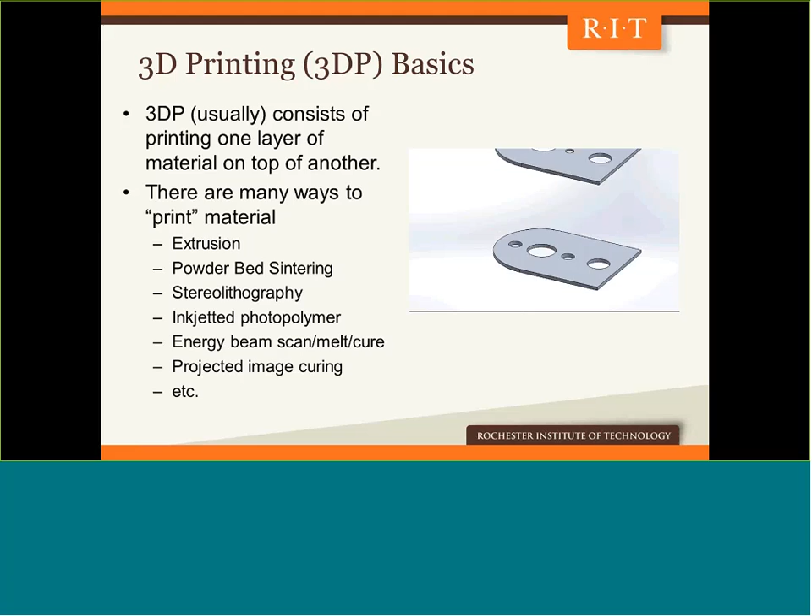So the basics: most 3D printing or additive manufacturing processes involve printing or depositing one layer of material on top of the next. In the same way that there are a lot of ways to print documents or photographs, there are also a lot of ways to 3D print materials. But the primary distinction here is that when you apply one layer on top of the next, you build thickness, and that thickness is the third dimension in 3D printing. So there's a list of different processes there, and I'll talk about some of them in the following slides.

3D printing can't do everything. There are limitations, and it's important to recognize them.

3D printers are very slow compared with conventional manufacturing, molding or casting. What you save is the time it takes to make molds that you would cast plastic or metal into. So you do save time on making molds, but the printing process itself is a little bit like watching grass grow, except that grass grows faster in some cases than some of these 3D printers. Most 3D printers are limited to relatively small, let's say 8 to 10 inch cube part sizes. That's fine for a lot of parts, but if you're in the aerospace or automotive industries, that's quite limiting.

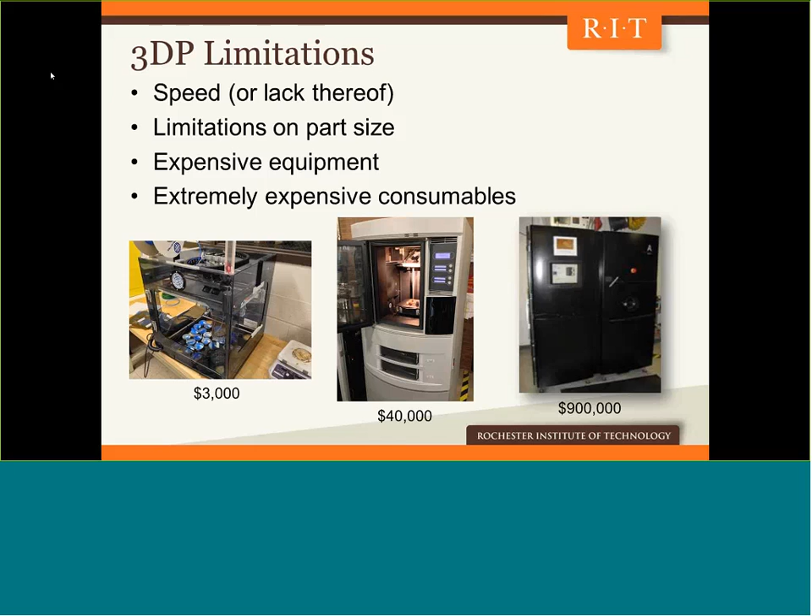The cost of the equipment, MakerBots are on the order of $3,000 now. The machine you see on the right-hand side of that image is almost $1 million, and that's for making metal parts. That was a machine in my old lab before I joined RIT. The consumable materials you print with these machines are also quite expensive. In a lot of cases, they might be 5 to 10 times more expensive than the same material you would mold or cast. That's a challenge the industry has to try to overcome in the coming years before these technologies gain more widespread adoption.

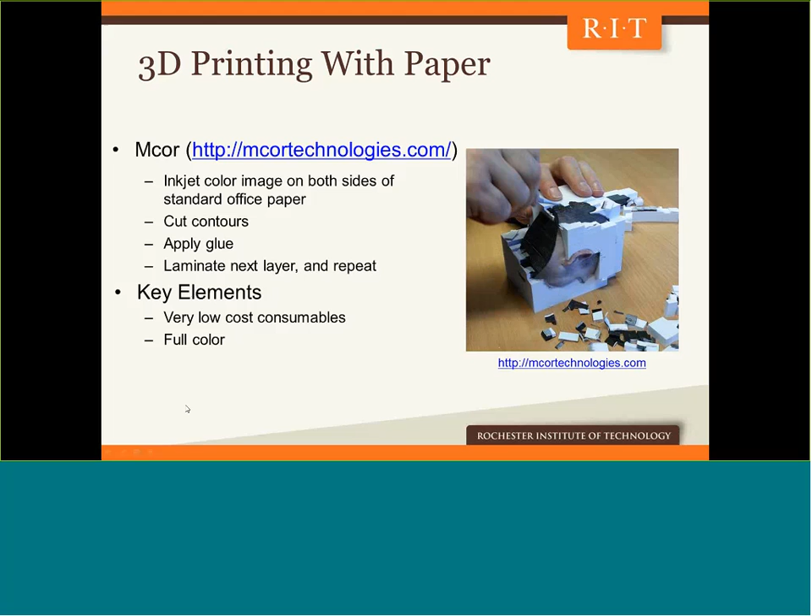The machine applies an adhesive material. You lay down the next layer of paper, repeat the process over and over again, and when you're done, the knife cutter has cut cubes into the scrap material around your part, and you can just pick those cubes off with your hand or a screwdriver, something like that, and you have a color printed part made out of paper at extremely low cost. That's a neat process that has a lot in common with some of the technologies this region is very well known for.

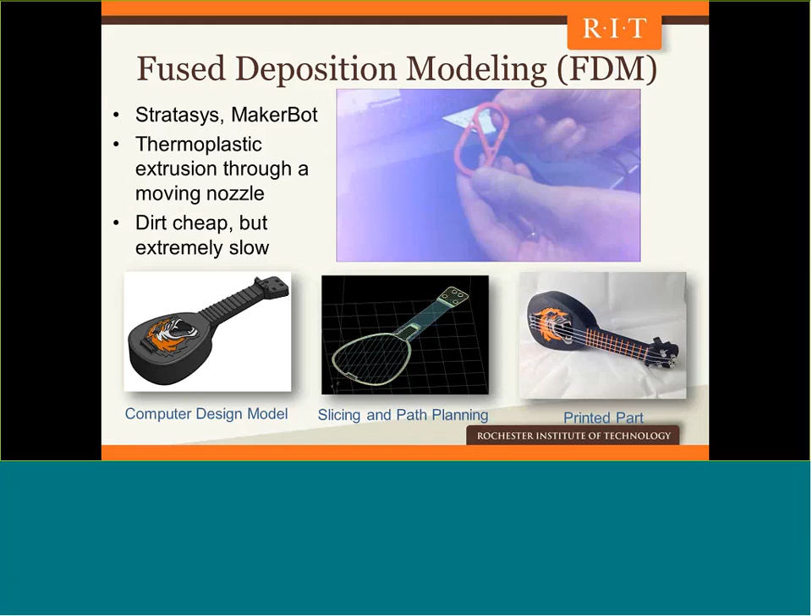Selective laser sintering is a higher-end 3D printing process in which you have a thermoplastic powder, and a doctor blade spreads a thin layer of that plastic powder, and a laser coming from overhead scans or traces the contour and then rasters back and forth and fills in the region that you would like to melt. Anywhere the laser beam scans over the powder bed, it melts the plastic, the same way that if you were drawing an image with a crayon, you trace the contour and then scribble back and forth to color in the area inside.

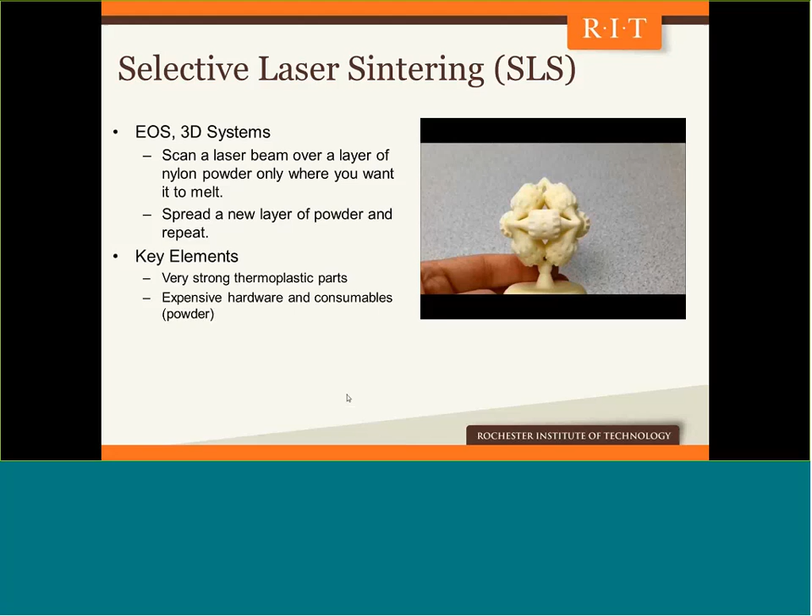If I play that again, one of the interesting things in this video I shot with my cell phone is that comes out of the machine exactly like you see. That's an assembly where the small gap between the moving gears and the pins in the middle of the gear is filled with unmelted particles of plastic powder. When you're done printing, you just wiggle those moving parts back and forth, and the loose powder falls out. That's an interesting aspect of 3D printing, the ability to make moving assemblies of parts without having to do assembly after the fact.

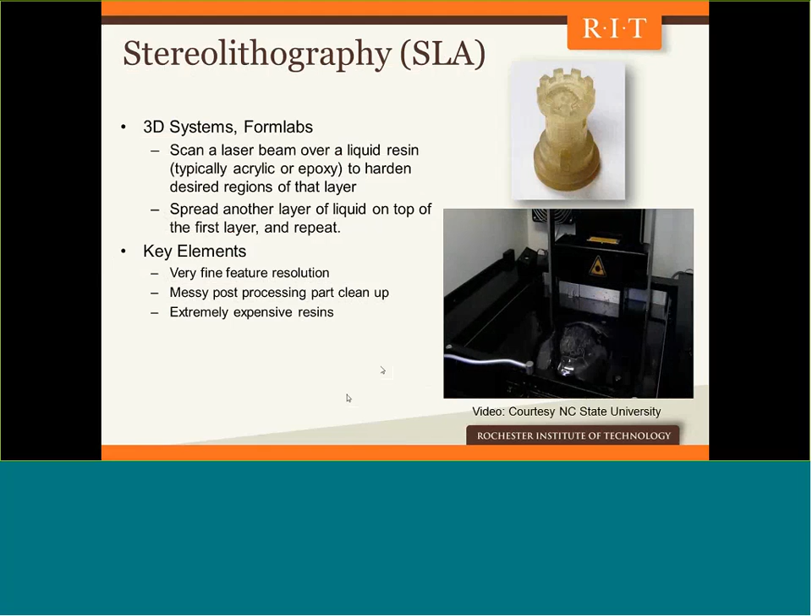Stereolithography, like you see in this video, was actually the very first commercialized 3D printing process. In the vat you see, there's a liquid plastic called a photopolymer. Anywhere that blue laser beam scans over the vat, there's a chemical reaction that causes only that plastic to harden, going from liquid to solid. Then a doctor blade spreads a thin layer of liquid plastic on top of the previous layer, and you repeat the process. Now, through the magic of Adobe Premiere, we fast forward to the end.

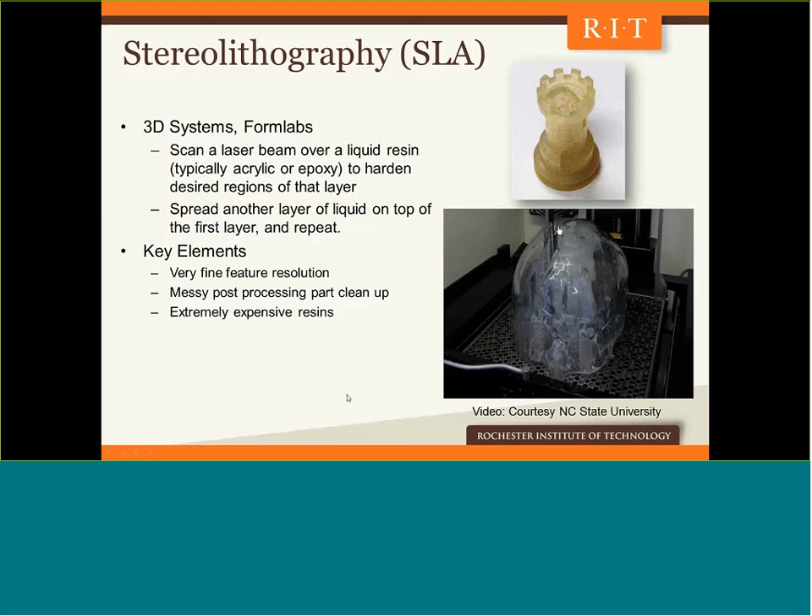This machine was in my old lab at NC State. We have newer versions of this process now, but that's a 3D printed skull model with a really nasty skull fracture. This is what's called stereolithography.

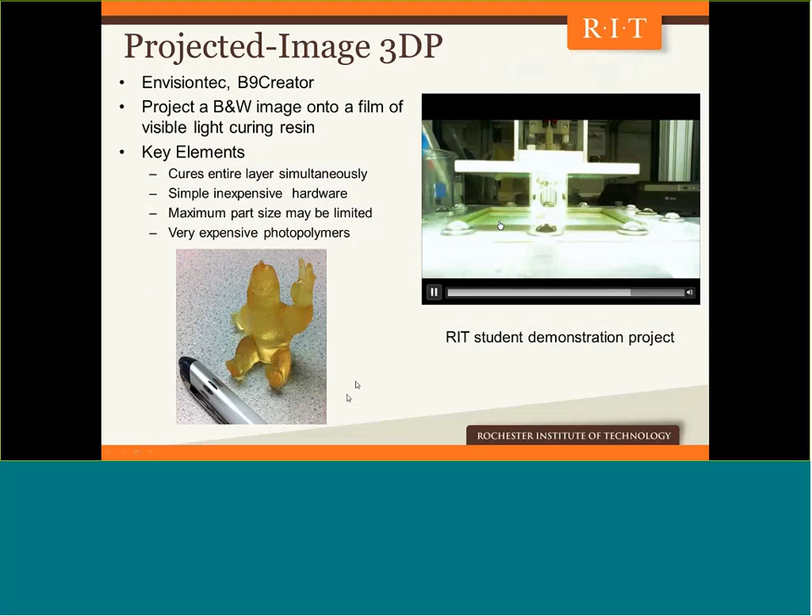One of the newest types of 3D printing is projected image 3D printing. This is fast motion video—students at RIT built this. Now you see it in real time. There's a vat of liquid plastic. That bright light underneath the machine is an ordinary overhead projector like you might have in a classroom, and it projects a black and white image up through the bottom of the clear tank. Anywhere that projected image is white, it causes the plastic to get hard.

Anywhere the image is black, the plastic just remains liquid. In this case, we're actually building the part upside down, so the part sticks to the build platform. The abominable snowman you see here was the very first successful build the students did using this machine they had constructed. It's worth noting they made their own plastic resin used in the machine too—they didn't purchase it, they mixed it up themselves. This was a nice learning exercise for the students. Machines like this are commercially available for on the order of $3,000, give or take, right now.

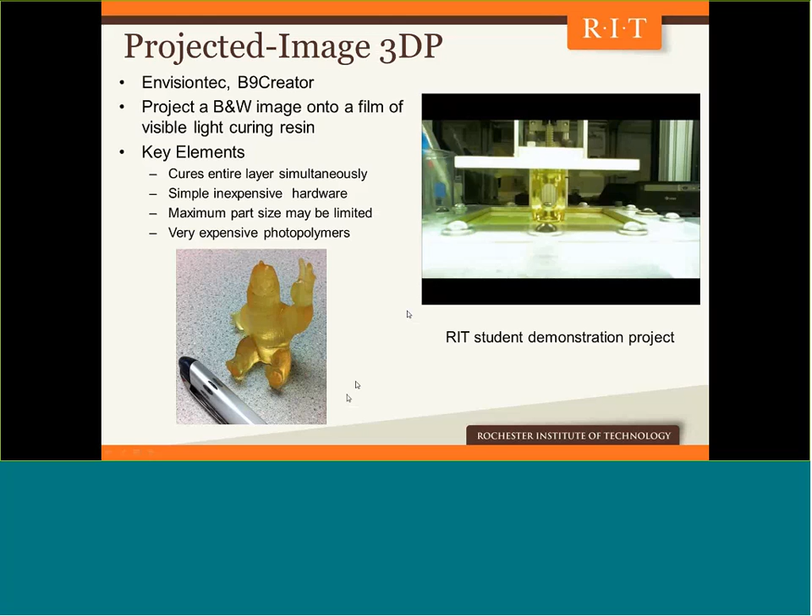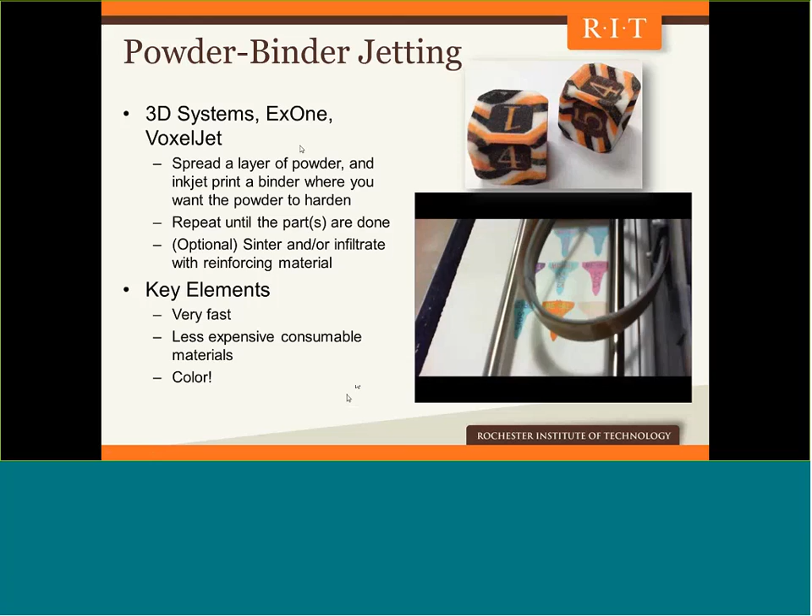We get to inkjet based printing, and this is where a lot of the cutting edge, or next generation, 3D printing developments are taking place. Stratasys and 3D Systems are the two primary companies working with this process. The idea here is that it's a color inkjet print engine like you'd normally use with colored ink, the difference being that the ink being printed is actually a liquid plastic, the same type you saw a couple slides ago with stereolithography and the projection-based machine.

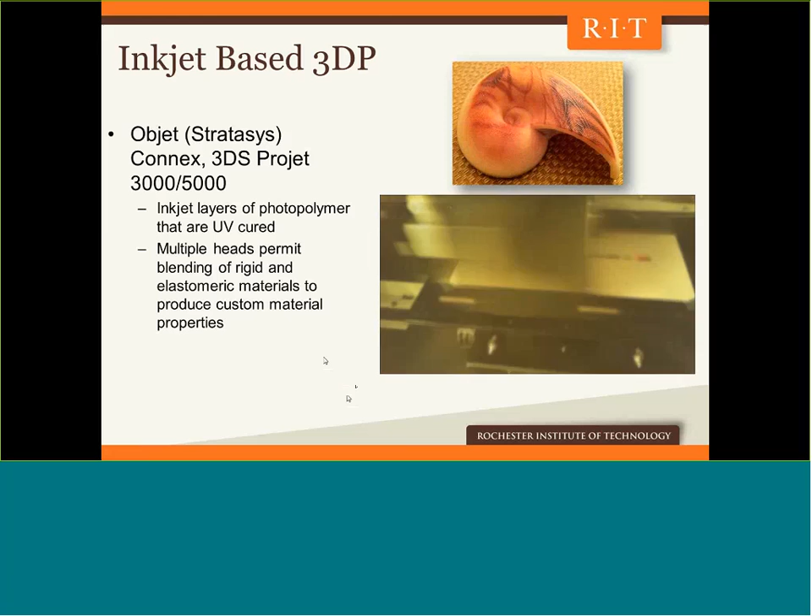So you're able to inkjet print color liquid plastic—I'll run this one more time. You'll notice when the video is running there's a bright blue flash—that's an ultraviolet light, and anytime you shine that light on the plastic, it gets hard, turning from a liquid to a solid. That's how you can print color, functioning plastic parts in three dimensions, printing one layer on top of the next.

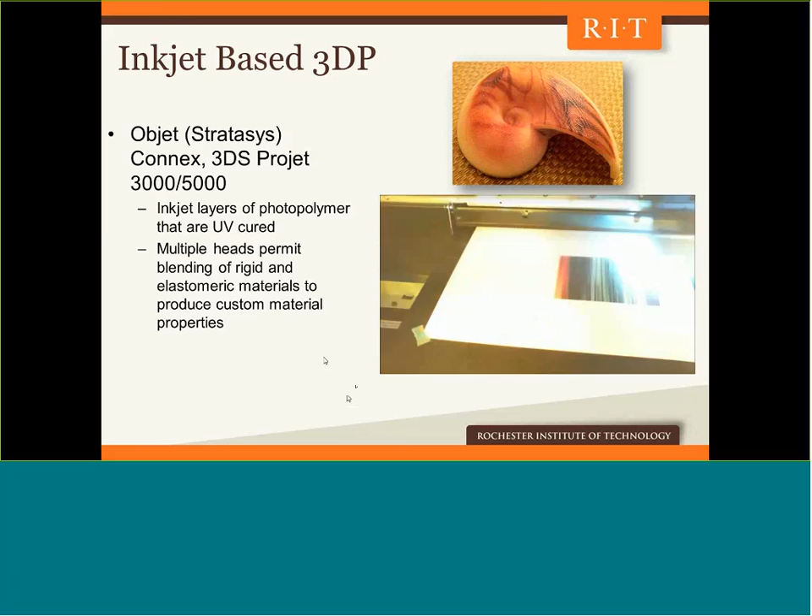This right here is a machine we just got delivered to the lab a couple weeks ago. The installation and training for this is going to take place next week, but we have one of these 3D printers in the lab now.

So can metal parts be 3D printed? And the answer is absolutely. Here's an example of an electron beam melting process. The same thing can be done with laser beams.

The reason it's a little bit tough to see what's going on here, the titanium melts at well over 3,000 degrees Fahrenheit, or over 1,500 degrees C, so you have to have a pretty bulky machine to protect the environment from those high temperatures. In this particular video, it's shot through a leaded glass window, so it's a little tough to see, but you get the idea.

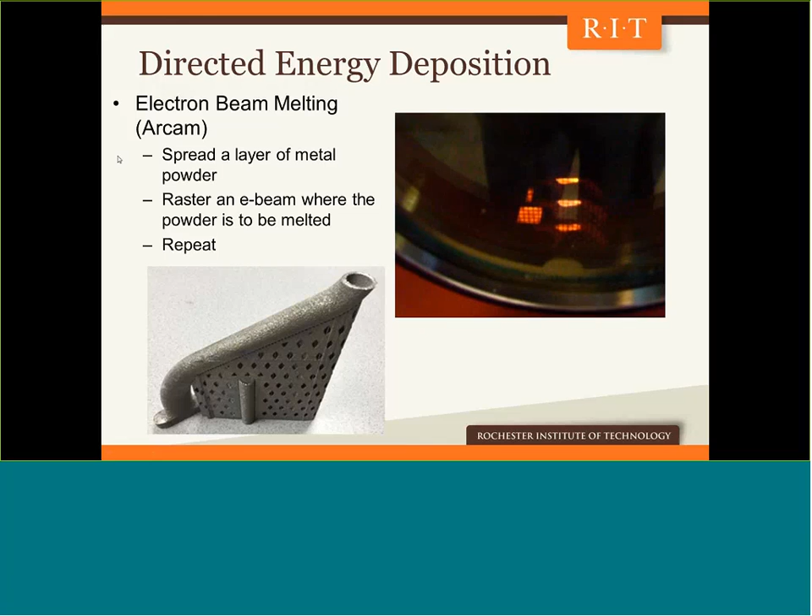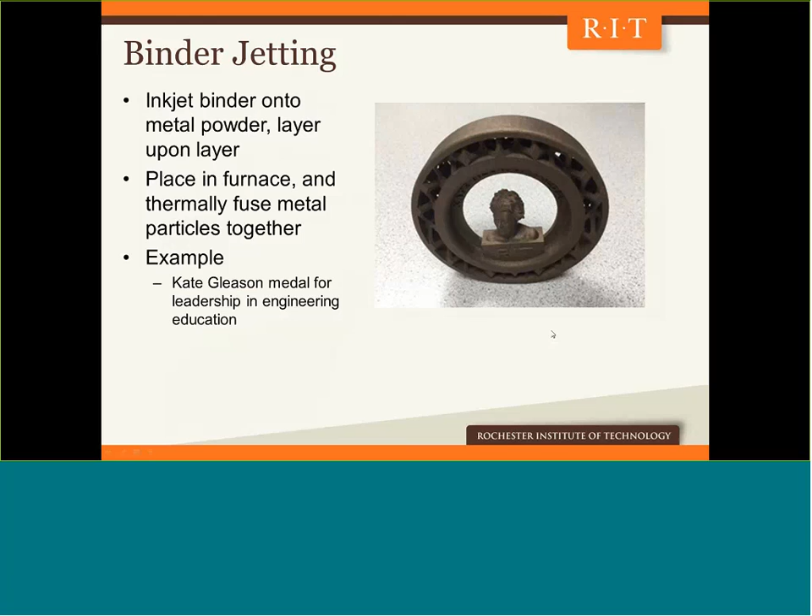The College of Engineering had a leadership medal that was awarded last year, and they asked me to design something that could only be done with 3D printing. It's named after Kate Gleason. I laser scanned the bronze bust of Kate Gleason in the hallway upstairs, and that's the scan, a miniature scan that you see. Then I designed the lattice structure and everything else around that, and this was printed in a bronze steel material that you see right here. A nice example of how that works.

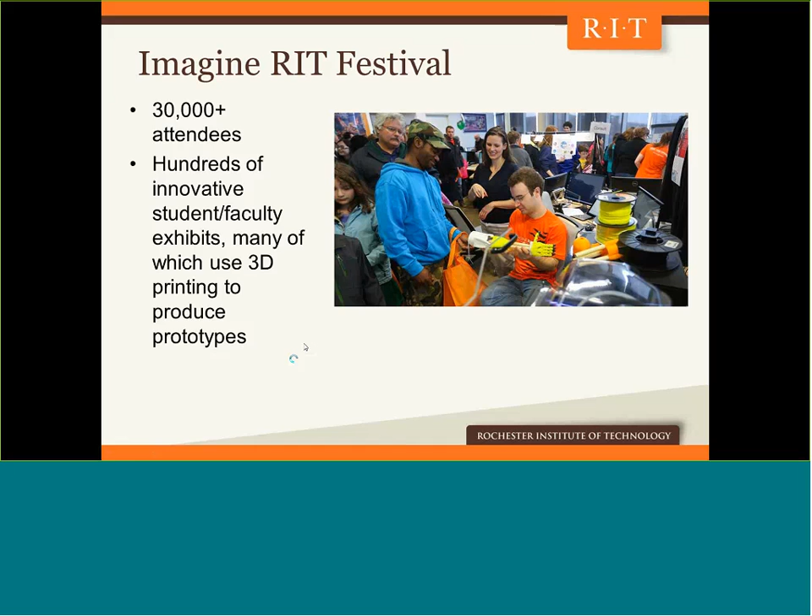It's an event where students, it's primarily student-driven. Students from all over campus spend a lot of time during the academic year leading up to May coming up with cool and fun ideas of things they would like to display or exhibit at the Imagine RIT Festival. A whole bunch of those ideas get 3D printed. What you see in this image is a chemical engineering student named Yasha, who is working on the Enable project, which I'll mention in a few slides, for 3D printing of prosthetic hands. But lots of other Imagine RIT exhibits are made possible because of 3D printing capabilities on campus. This was an interesting one.

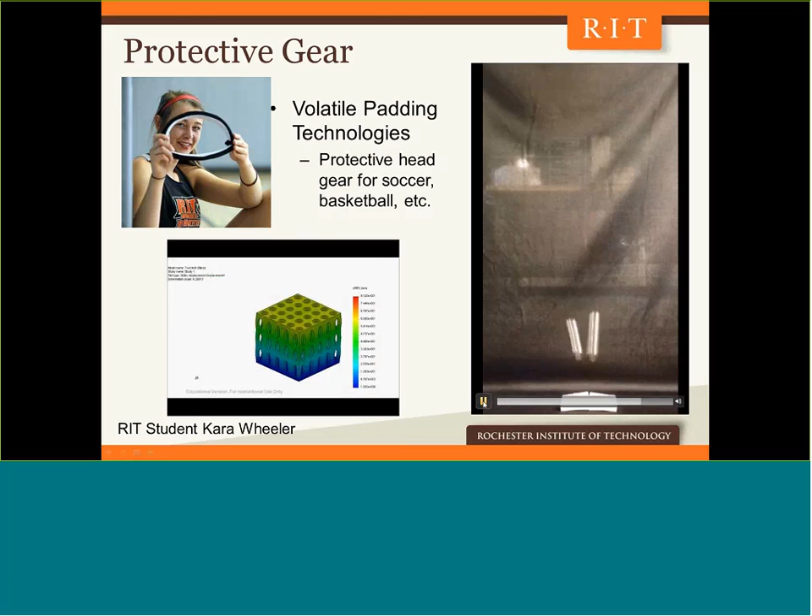In this little video, there are examples of 3D printed rubber material where I put a special type of fluid in one side and not in the other. When the steel balls bounce, you can see the one on the left does a much better job of absorbing the energy than the one on the right. So this is an interesting use of 3D printing that was student-driven, again, with a very specific need.

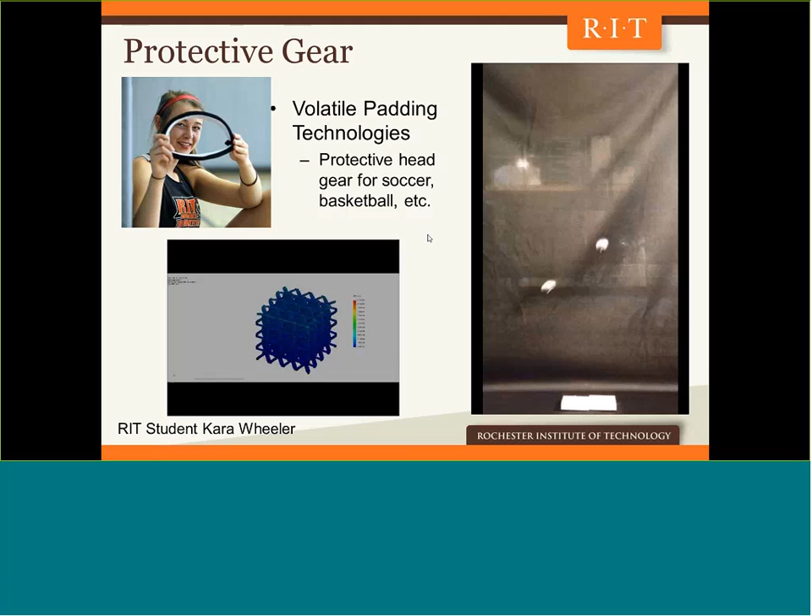There obviously are professionally made prosthetics suitable for adults. But when a prosthetic is $50,000 or more and a child is growing every year - anybody who's a parent on the call knows how often you're buying new shoes and clothes - it's a difficult proposition to keep making new prosthetics every year or so while the child is growing. So that's one motivation here, but also in developing nations, even for adults, it's not cost effective or feasible to have these very expensive prosthetics. So this is a great effort.

The designs for different prosthetic hands and arms are open source and available. You can download them from that website, and anybody on the planet who has a 3D printer can download the plans, customize them, and 3D print them for somebody who lives nearby. So that's another nice campus initiative.

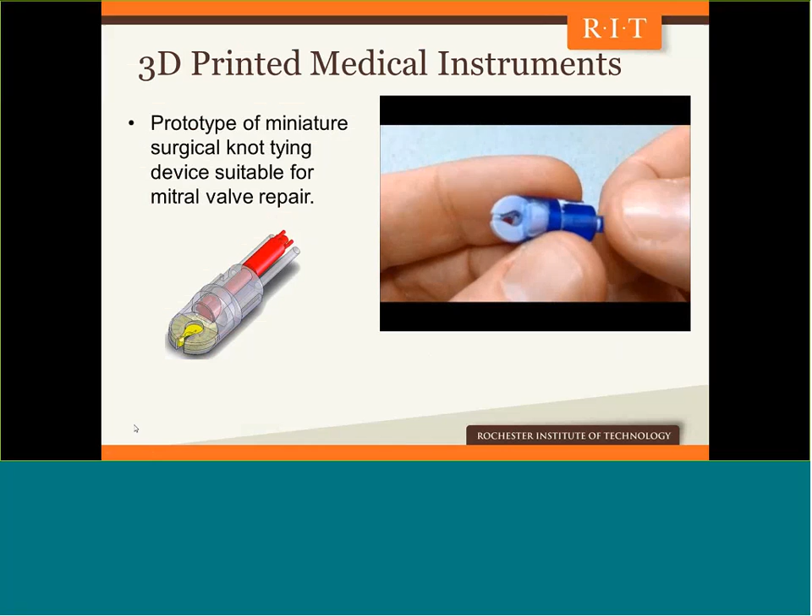Here are a couple examples of 3D printing with medical instruments. This was a project I was involved with involving minimally invasive surgery for mitral valve repair in the heart. If you have a leaking mitral valve, they ordinarily would do open heart surgery where they have to cut your chest open - that's not minimally invasive, that's maximally invasive surgery. With minimally invasive surgery, they just make tiny incisions between the ribs, between the cartilage, and insert tubes that the medical instruments go through.

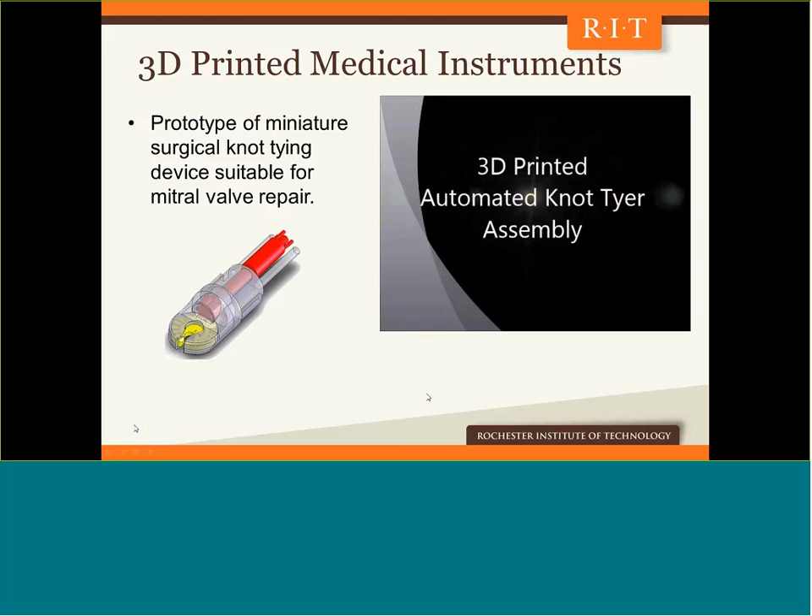This specific project, funded by the National Institutes of Health, had us designing an automated knot tying mechanism, which you see prototyped right here. This is another example of a prototyped assembly where it was printed exactly like you see it - it comes out of the machine as a moving assembly, no assembly required afterwards. So this was a nice use of 3D printing.

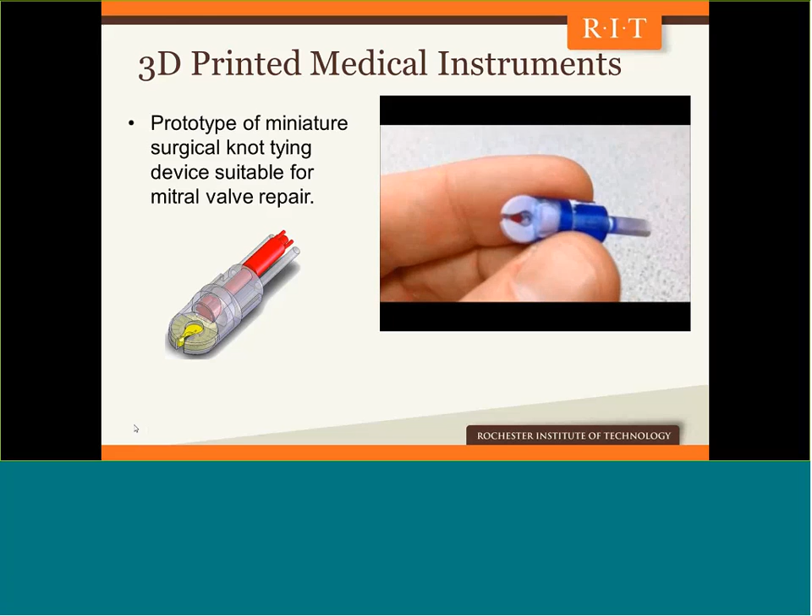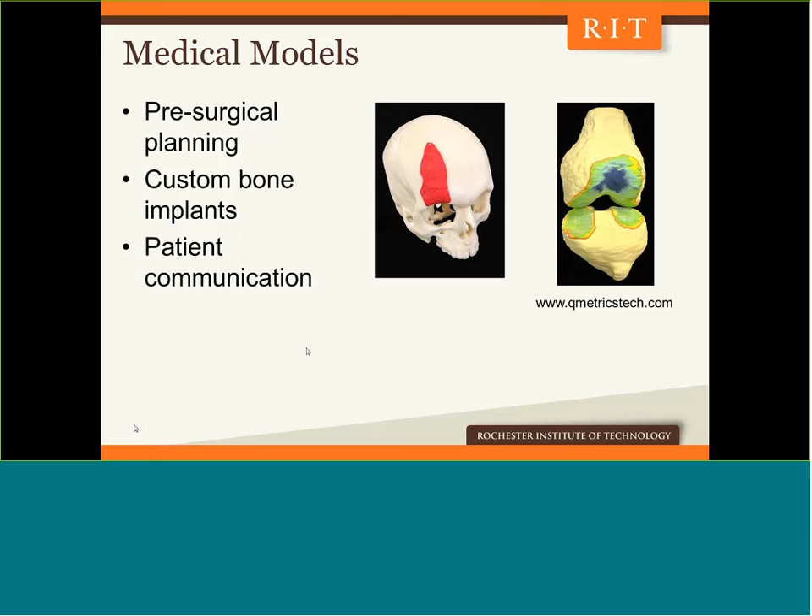This is an example of a medical model. In the 3D printing class I teach, there were students interested in biomedical applications of 3D printing, so I gave them a model of a skull with a nasty skull fracture, and they had to design a custom bone plate that would be 3D printed in titanium for the surgeon to put in place. Those are some examples of how here at RIT we're using these for medical models.

This was an older case, but a nice one I did back around 2003 or so. A German Shepherd with severely deformed hindquarters. There's a special surgery - it sounds gruesome, but they do this with people too. If the bone is curved, you make a cut in the bone, straighten it out, allow it to heal, and everything's fine. This one was much more complicated because the bone was curved and twisted in multiple directions, so it was a really complicated surgery.

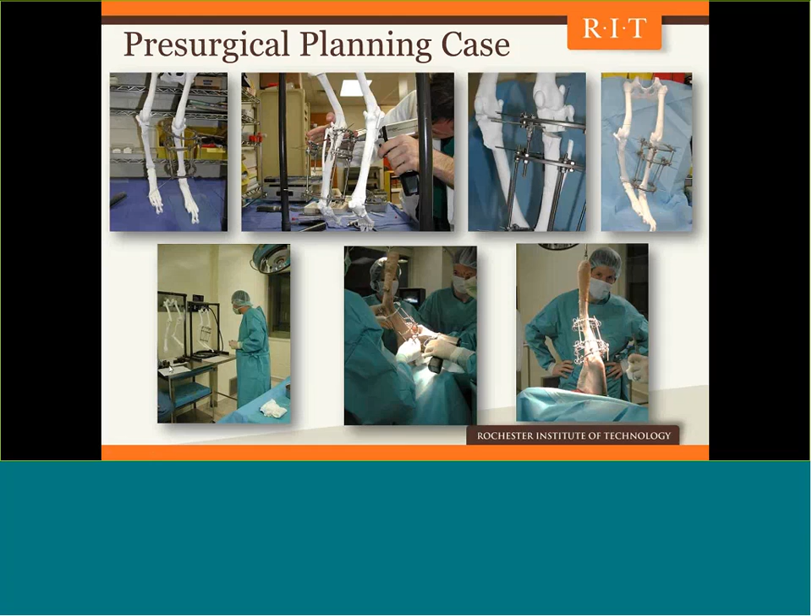The lower left image shows 3D printed plastic models in the operating room, where Dr. Marcellin would go over during the surgery and take measurements of where he had made cuts to the bone, and what angles and things like that, and then he would go back to Bailey, the dog, and replicate that. In the end, there's a very, very happy ending - Bailey went from not being able to walk to chasing the cat around the backyard. We did a whole bunch of these types of pre-surgical planning for difficult procedures over the years.

This is a current ongoing project, multidisciplinary between David Borkholder, a professor of microsystems engineering here, who's the lead on this project. We have several students from at least 3 different departments, 3 different disciplines working on it. This is a project to design, prototype, and test an implantable micropump for delivering drugs to the inner ear to treat hearing loss.

This is an example of next generation 3D printing where we are printing electronic materials, so we can print conductive silver or copper electronic traces, circuit board materials. We can print wax material that when it melts, expands. So we have this wax material that will expand, and when it expands, it squeezes the rubber tubing that has the drug in it, and when it squeezes the tubing, it pushes the drug forward. That's how it's actually pumping, by melting or solidifying wax.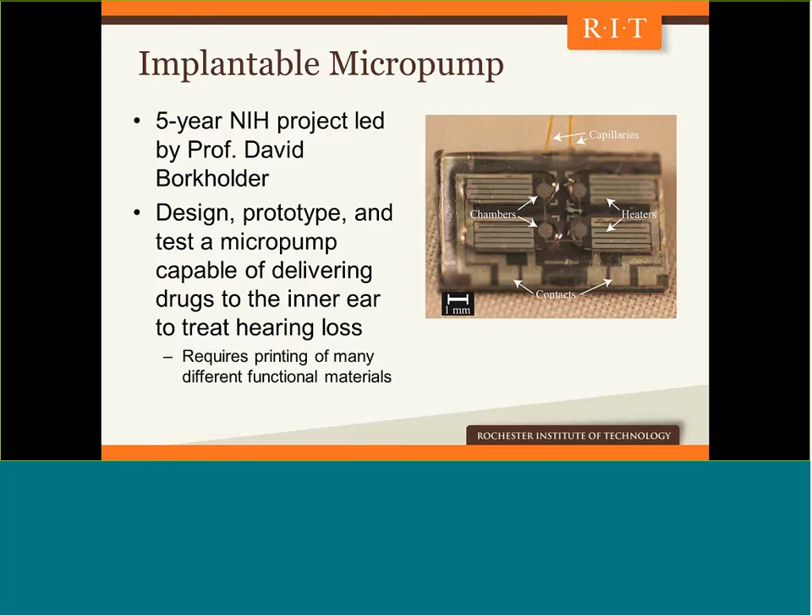So big picture, I think there was a question early on about the significance of 3D printing, and I did talk about impossible geometries and not having to make molds and things like that. But I'll also highlight this: prior to the advent of 3D printing, if you were a company with very deep pockets and had an idea for a new product, that's fine - you've got the budget, there was a model shop, you could make prototypes and evaluate them, and that was fine.

If you were an ordinary person with a really good idea, it was often not practical for you to have prototypes made. With 3D printing now, there are maker spaces in just about every community, Rochester included, where anybody with an idea can go to a community maker space and have a functioning model of their part 3D printed. There are lots of local service bureaus who 3D print professionally and do a fantastic job. Even kids in elementary, middle, and high schools have 3D printers in their libraries or robotics teams. I think this is one of the biggest impacts of 3D printing—it's really accelerated the rate of innovation and who has access to turn their ideas into models and hopefully into startup companies or licensed technologies.

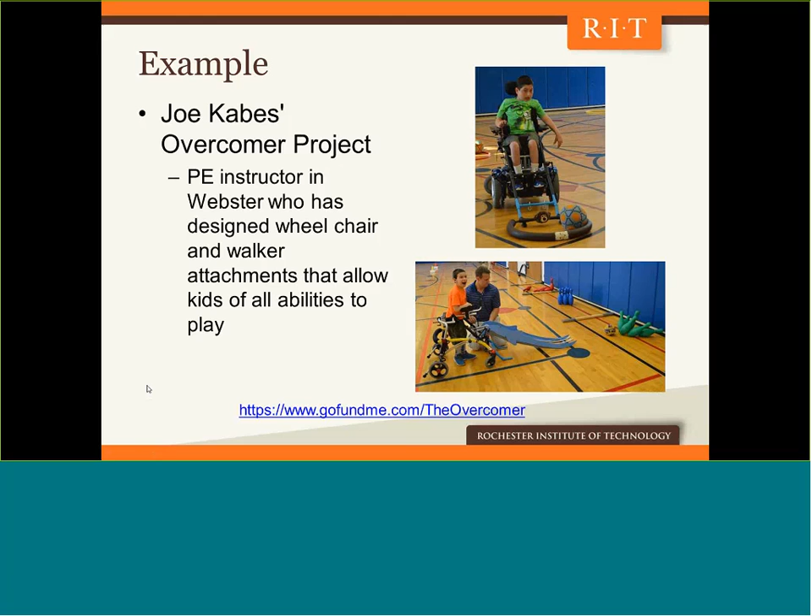But we're putting a project together this summer, and this will be a senior design project next year in engineering, where students will design more production-ready hardware for Joe. Then we'll use 3D printing to print prototypes of that hardware to make examples he can take to a production company to try to get these things made. The web link on the bottom right has details and other examples of prototypes Joe has made. I love that example too, of a person who's been able to turn his ideas into reality.

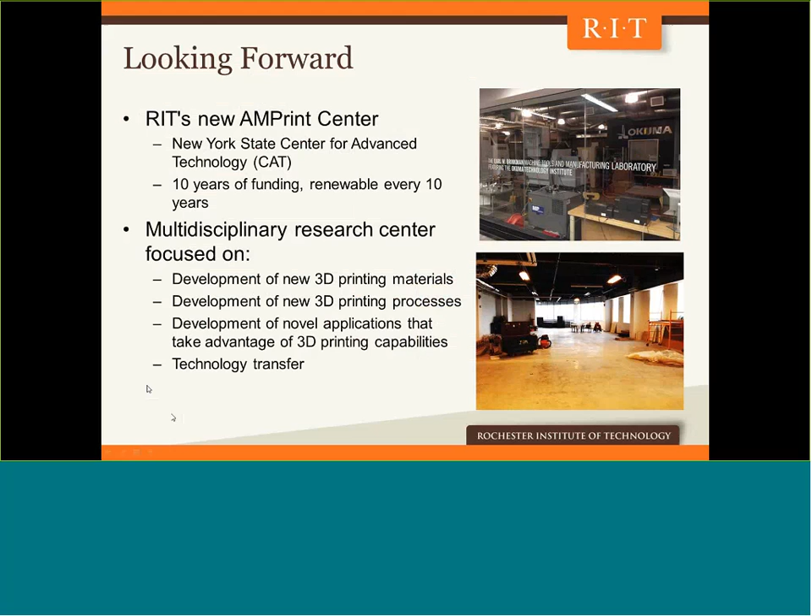To close things up, looking forward, RIT just a few months ago got funding from New York State for a new Center for Advanced Technology, or CAT, focused on additive manufacturing and 3D printing. The lower image shows what the space looks like today. In October, we'll have our grand opening with all the new equipment going in there. Right now we're cramming all the equipment into the lab you see on top, but this will be a beautiful facility when it's ready in October.

With that, I have maybe 5-6 minutes for questions. Yep, I'll try to talk fast. Yep, we've got a couple. We have several, but we can only get to a couple. So this question comes from Bruno.

Has 3D printing been done with organic materials for things like skin grafts?

Yes, definitely. We're not doing it here at RIT, but there are folks at Wake Forest University, Harvard, and others doing inkjet bioprinting. If the liquid you're inkjetting, instead of cyan, yellow, and magenta pigments, might be stem cells. So yes, biological materials are definitely possible. Realistically, printing replacement organs is 20 or 30 years away from actual implementation in people, but there are some short-term possibilities like cartilage and skin.

Great, question from Henry, which is quite topical given what's been in the news in the last week or so. Henry, although he's a supporter of the Second Amendment, is concerned about people using 3D printing to make guns. What's happening in this area?